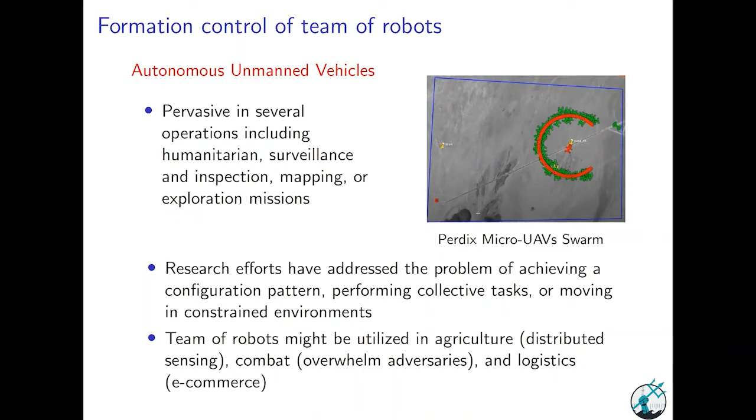In the future, it is believed that team of robots might be utilized in several domains. This includes agriculture with distributed sensing, combat mission in order to overwhelm the enemy, and logistics with the future of e-commerce. In this video, released in recent years by the Department of Defense, it has been demonstrated that teams of unmanned aerial vehicles could be utilized in combat operation.

Most algorithms proposed for multi-agent systems are often inspired from biological systems where it has been observed self-organized and coordinated motion. So this is the case of fish shoal, bird flock, bees, and ants colony. In this picture, we can actually see a group of fish executing a collective maneuver in order to avoid a predation attack. Among algorithms proposed for multi-agent system, we have the leader-follower relationship, which is a very popular scheme.

In this control scheme, few individuals denoted leaders are believed to have a good knowledge of their environment so that they can guide other group members towards set location. In insect group, for example, this leadership has been shown to benefit the group, notably during foraging or migration. For robotic application, leader-follower relationship might be cost efficient, as only few individuals might be equipped with expensive navigation sensor. This includes LiDAR for simultaneous localization and mapping, or differential GPS.

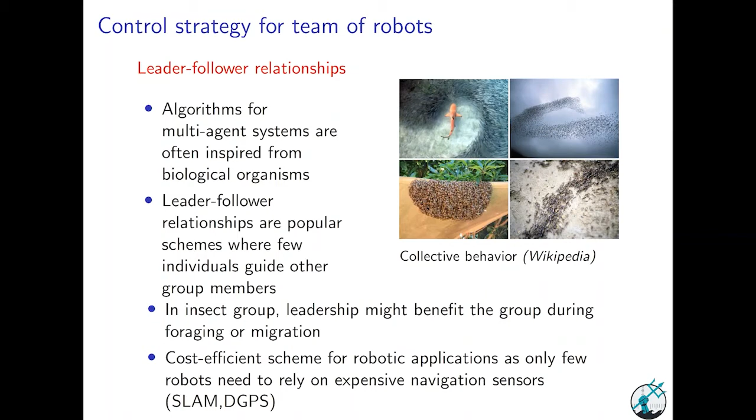To solve for the problem of state estimation or control, we distinguish decentralized and centralized method. Decentralized methods are often preferred over centralized method, notably in case of environmental constraint or limited communication, where centralized approach would not be applicable. So in decentralized approach, real-world robots have to rely on their own sensing capability. So this includes the use of proximity sensors such as ultrasonic sensor, camera, or other light-based sensor. These proximity sensors are observed to have limited range and to provide noisy data measurement.

In the literature, to solve for this issue, several methods have been proposed. So these include the development of robust estimation method, nonlinear Kalman filter, or the use of multiple sensors in order to improve the accuracy of both relative and absolute localization methods. Despite these great advances, the development of appropriate strategy capable to deal with both the absence or intermittent feedback sensor measurement is still an open research question.

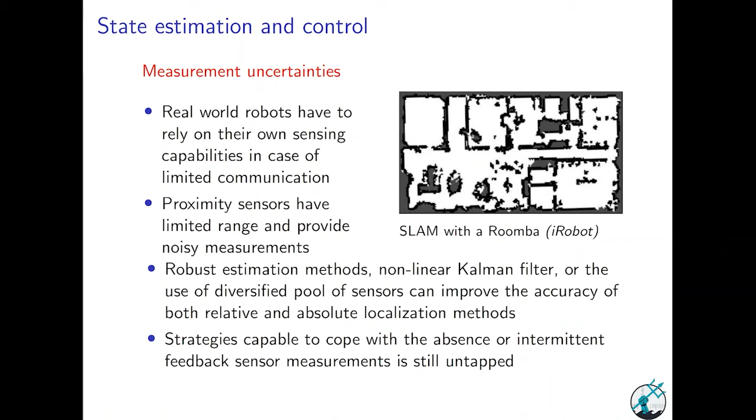Here, we consider a team of N mobile robots moving on a circle with angular position θi, updated after p time steps with a control input ui. Our robotic system faces several challenges. First of all, due to the use of low computational power, the onboard computer can only process data after p time steps. Each robot has no means to uncover the identity of another robot. Next, the estimated distances are absolute, meaning that a robot has no means to know whether the robot detected is placed ahead or behind. The data returned are also noisy and limited.

So this can be summarized by this equation where the estimated distance equals the true distance plus a certain noise, where the noise is bounded by a constant value, delta max. RV here is the maximum sensor range, and p is the number of time steps required actually to measure and process data. And when a given robot i cannot detect any other robot, then it will return NA.

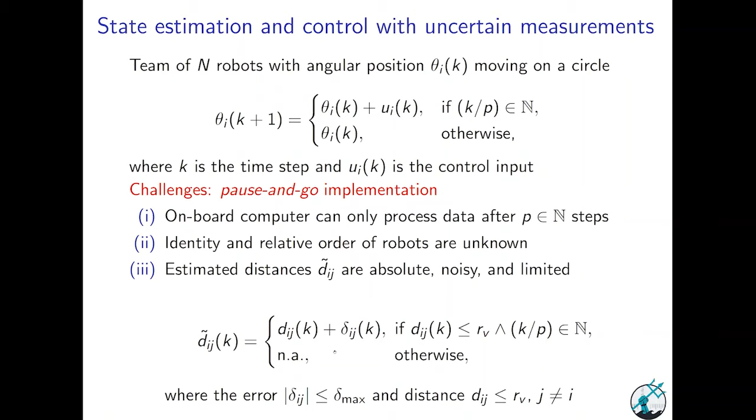To illustrate, we consider three robots, robot i, robot j, and robot l on the circle. So robot i and robot j are placed within their cone of visibility, so clearly they can detect each other. And because robot i, for example, can only return the absolute position of robot j, we have two uncertainty intervals materialized here in blue. While robot i cannot actually detect robot l, and in that case, the estimated distance will be NA.

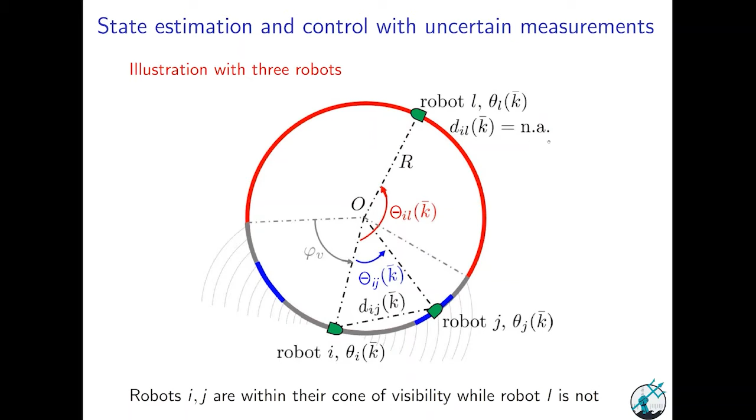In this work, we want to find a suitable controller ui in order to achieve an epsilon self-balanced state. So clearly, we want our team of robots to be equally spaced on the circle. And the error in the formation must be less than epsilon, where epsilon is a positive constant.

The relative phase angle between two robots is defined with the function which is set so that the angle returned is between negative pi and pi.

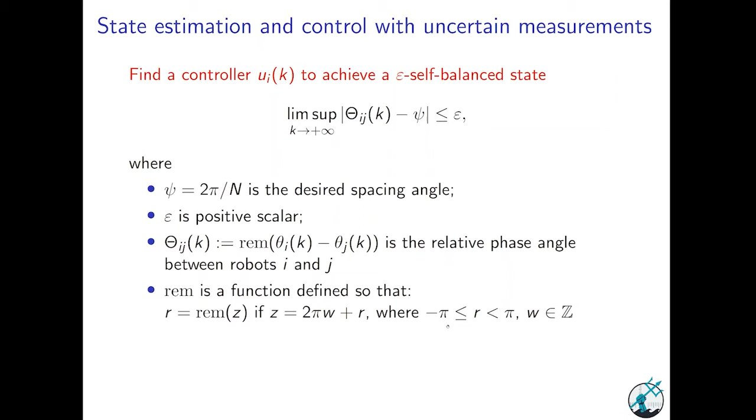Before we provide our state estimation and control algorithm, let's go over some useful definitions. We define the relative phase distance between robot I and robot J by this quantity phi, which is actually the absolute value of the relative phase difference between robot I and robot J.

Given the measured Euclidean distance returned by the sensor, the relative phase distance can be explicitly estimated using this expression. So here we know R, which is the radius of the circle.

We can then determine the uncertainty interval when robot I and J can actually detect each other, and it's given by this interval where phi max here can be explicitly computed, knowing the maximum noise value, the radius of the circle, and also the maximum sensor range angular value.

We also define the maximum uncertainty interval given by bar upsilon, which is equal to this interval. And using the above definition, the following relation holds. That is, the relative phase distance between two robots is always included in one of these intervals.

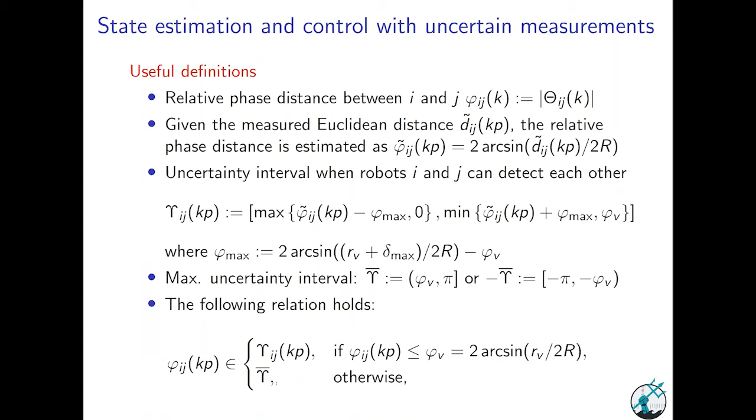Our multi-level control strategy is defined so that a leader is randomly elected. We set its control input to a constant reference value, omega ref. So the leader will always move at a constant angular speed after p time steps.

While for all followers, that is for all robots with index I greater or equal to 2, the multi-level control strategy is defined so that initially when they are not able to detect a robot approaching, their control input will be 0, so they will stay immobile. And as soon as they detect a robot approaching, there are two eventualities.

If the robot is placed at the desired spacing distance, then they will move at a constant angular velocity omega f. While if the spacing distance is not the desired one, then it will accelerate at an angular speed omega f plus c, where c is a positive constant.

We note that in this expression, ki here defines the first time instant where a robot is actually capable of detecting a robot approaching.

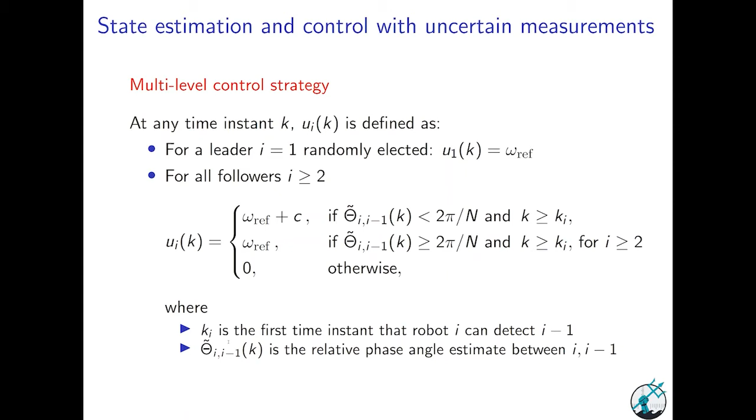Now, to better illustrate our state estimation and control, we provide this figure where we have three robots: robot I, robot I minus 1, and robot I plus 1. At the beginning of the experiment, the robots cannot actually see each other.

In that case, robot I minus 1 will be in the red area, so that the interval estimate of robot I, of the position of robot I minus 1 and I plus 1, will be the union of negative bar upsilon and positive bar upsilon, as shown here.

Now, when robot I minus 1 moves and gets into the cone of visibility of robot I, robot I will set to empty the interval estimate for all other robots except for robot I minus 1 that it can detect. And in that case, it will actually evaluate this intersection.

That is the intersection between the interval estimate obtained at the previous time step and the union between the negative interval estimate where robot I minus 1 might be and the positive interval estimate upsilon ij.

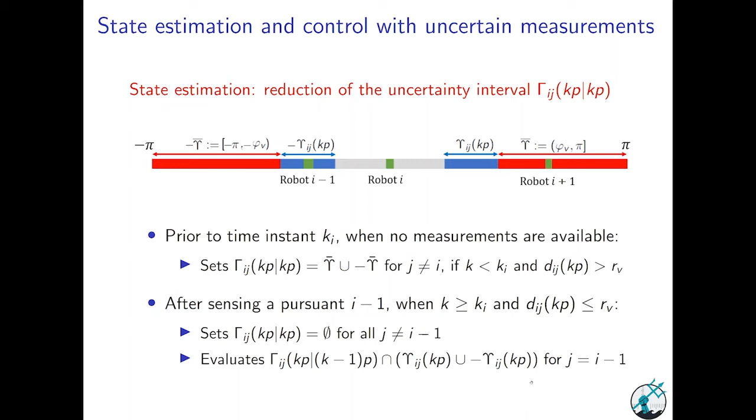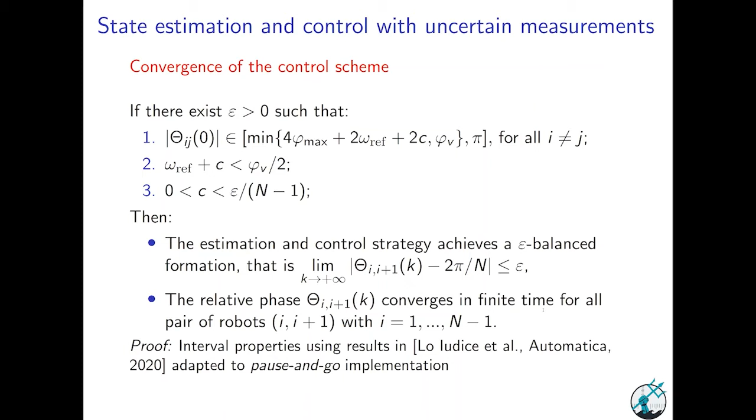For the proof, our control scheme is a particular case of a more general control strategy introduced in Lo Iudice et al. in Automatica 2020. Now, let's give some important features of our algorithm before showing the experimental results.

First of all, we note that the control parameter C can be carefully selected in order to balance the trade-off between accuracy and convergence speed. Clearly, smaller values of C might help improve the accuracy of our control scheme while increasing the convergence time. Larger values of C might reduce the convergence time while impacting the accuracy of the control scheme.

We note that for larger team sizes, our control scheme still converges, but the main problem with large team sizes is that pairs of robots can actually detect each other, and this might hinder a key feature of our algorithm where we assume that at steady state pairs of robots cannot detect each other.

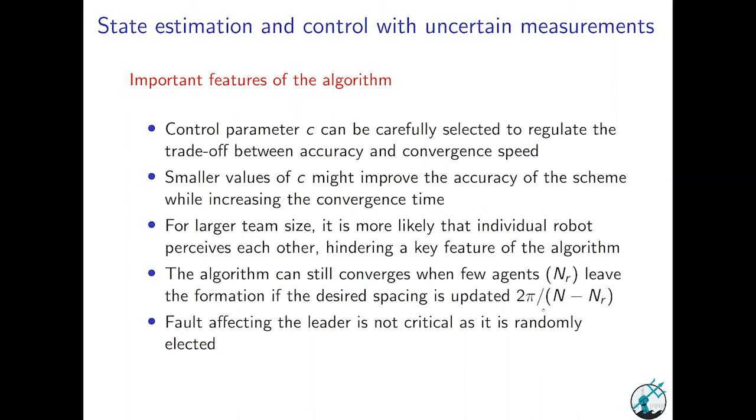We also note that our algorithm can also converge when a few agents are removed from the formation, and the only requirement here is that the number of robots remaining in the formation is updated. We note also that as the leader is randomly elected, a fault affecting the leader is not critical to achieve the self-balancing state.

We utilize a custom-made robotic platform equipped with an ultrasonic sensor mounted on a servo in order to rotate ahead and backward to measure proximity distance. The robotic platform is also equipped with 2 plates in order to improve the probability of detection.

The functional block diagram shows the Raspberry Pi computer board connected to the ultrasonic sensor. Here we also utilize an Arduino microcontroller in order to process analog data.

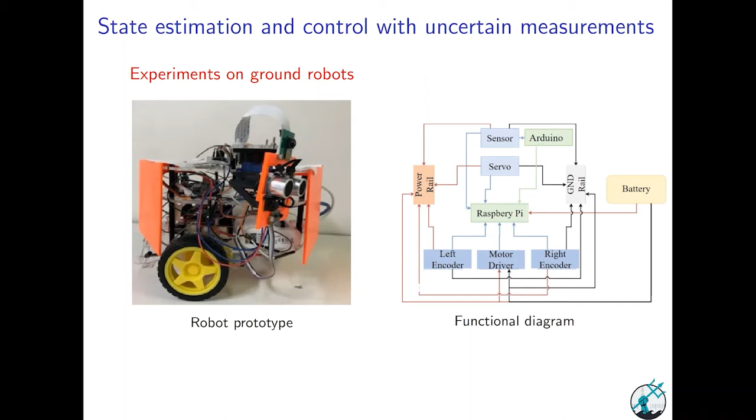At the beginning of the experiment, the robots are placed so that they cannot detect each other. We set a threshold of 1 meter so that data detected above 1 meter are actually trashed by our code. Initially, the first robot placed at the extremity, shown here, is selected as the leader.

The robot moves at a constant speed, and when it comes close to the proximity of the second robot, that triggers the state estimation and control algorithm of the second robot, which then starts moving. After a few time steps, when it enters the cone of visibility of the next robot, it triggers the state estimation and control of the third robot, which also starts moving.

Both robot 2 and robot 3 accelerate at an angular speed of omega ref plus c. This process will repeat itself until the desired self-balanced state is reached, and at that time both robot 2 and 3 will move at a constant angular speed omega ref.

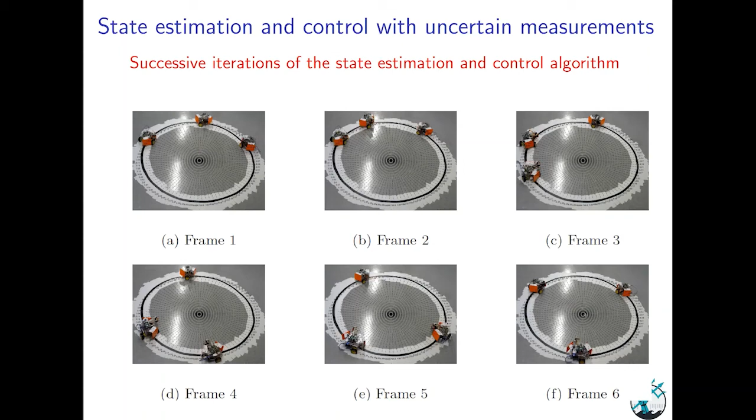In this slide, we present the convergence of our control scheme by plotting the angular speed over time and also the phase angle difference over time. First, for the angular speed, we observe a discrepancy between the control input and the observed value due to noise in the implementation of our control scheme.

Our robot implements a line follower, that is, its motion is not smooth, explaining the discrepancy between the control input and observed value. We recall that the control input takes 2 values, either 0.1 for the leader or when the robot reaches steady state, or 0.3 when robots 2 and 3 accelerate in order to reach steady state.

So we have the time trace of the phase angle difference between robot 2 and 1 and robot 3 and 2. We observe that the system reached the self-balancing state after about 17 iterations.

In the table below, we present some statistics of the convergence of the control scheme. We observe that in most cases, that is over the 5 trials that we have performed, robot 2 will take a minimum of 6 iterations and a maximum of 7 iterations in order to converge, while robot 3 will converge in a minimum of 11 iterations and a maximum of 14 iterations.

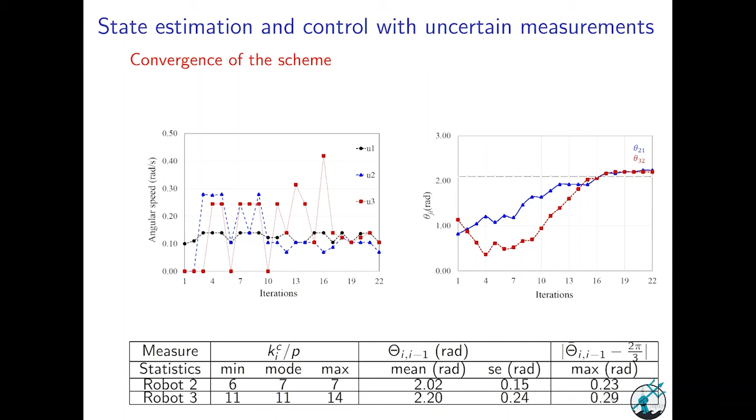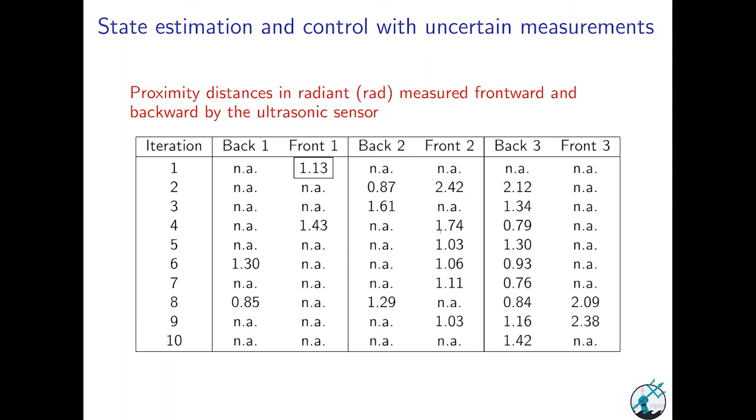We have proposed a non-cooperative and fully decentralized state estimation and control algorithm that has been implemented in terms of a pause and go move, where during the pause, the robot stops in order to measure and process data, and during the go, they either accelerate in order to reach the desired spacing angle, or they move at constant speed when they have already reached the desired spacing angle.

The proposed algorithm is inspired by the behavior of some insects such as locust nymphs that have been observed to stop in order to enhance the effectiveness of their next move. The algorithms have been tested on a low-cost robotic platform equipped with an ultrasonic sensor and a low-cost computational board.

We have shown that the state estimation and control strategy is capable of autonomously placing the robots along the circle. Our proposed strategy is also robust enough to handle occasional false readings and other inaccuracies of the ultrasonic sensor.

The pause and go scheme proposed is suitable for low-cost micro-robotic platforms that are not time critical but require limited payload and accuracy. In the future, the proposed scheme might be tested using more accurate sensors and also a more powerful computational board.